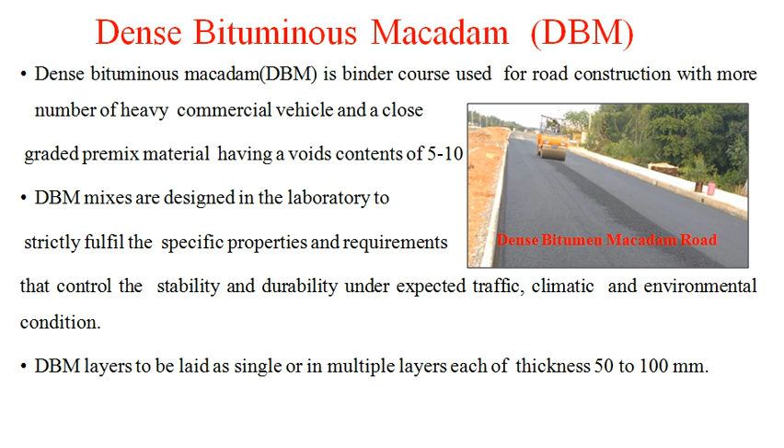The dense bituminous macadam layers, which are to be laid as a single or in multiple layers, are to be laid in a thickness of 50 to 100 mm each.

Now the materials used for the construction of the dense bituminous macadam. In order to satisfy the criteria of the DBM mix, it shall consist of the coarse aggregate, the fine aggregate and the filler in suitable proportions with the required binder content. This proper blend of the aggregate should be done so as to make the final gradation such that it will satisfy either of two limits according to the thickness in the adjacent table.

So if you see the table here, we have the grading number and the sieve size. So this DBM mix should satisfy the grading as per the given table, and it should be a well graded mix so as to fill in the voids which are being left out by the coarse aggregate.

The voids present in the coarse aggregate will be filled by the fine aggregate, and then the voids present in the fine aggregate will be filled up by the filler material, whereas the binder, that is the bitumen, will form a better bonding between all these ingredients. At the same time, it will also fill up the voids left after the filler gets added into the coarse and the fine aggregates.

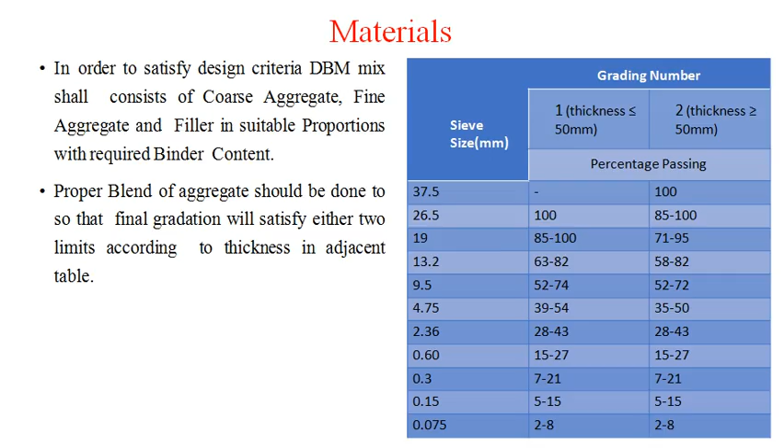Next is the coarse aggregate. Coarse aggregate is retained on the 2.36 mm sieve, and it should preferably have low porosity. In case the aggregates present on the site are more porous, then extra bitumen for the absorption by the aggregates shall be provided in order to satisfy the design criteria.

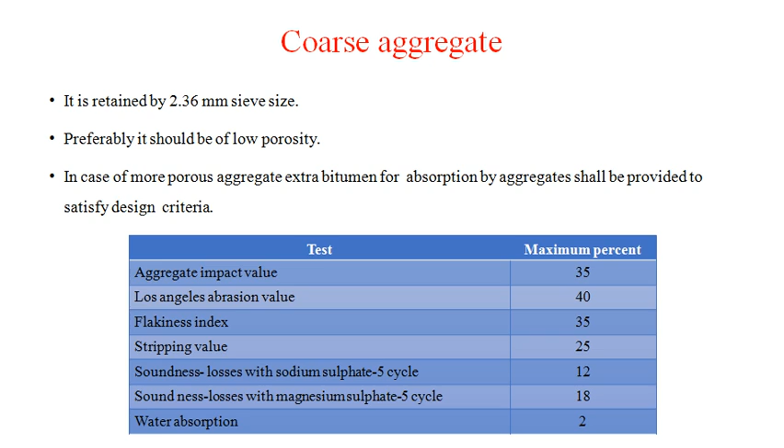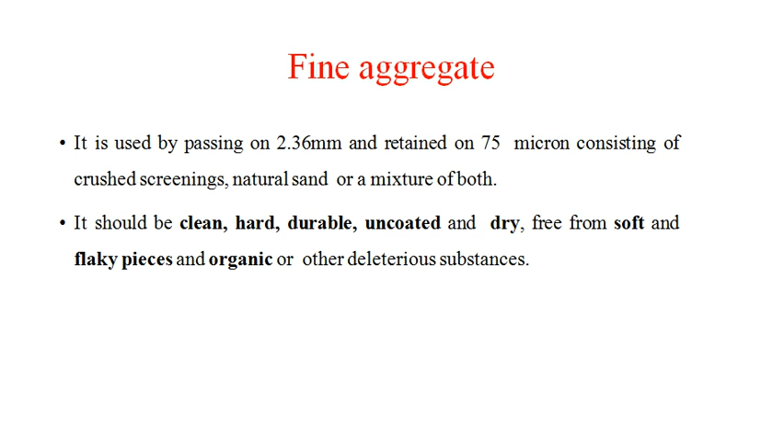Next is the fine aggregate. It consists of the crushed material passing the 2.36 mm IS sieve and retained on the 75 micron sieve. This fine aggregate should be clean, hard, durable, uncoated and dry. It should be free from soft and flaky pieces and organic or other deleterious substances.

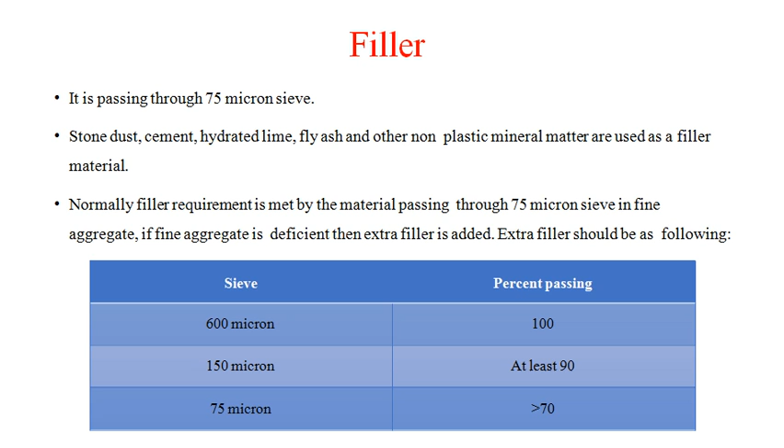The bitumen. The bitumen shall be viscosity grade paving bitumen complying with the Indian standard specifications, and the appropriate grade of the bitumen should be selected after considering the region, the traffic and the environmental conditions where the pavement has to be constructed.

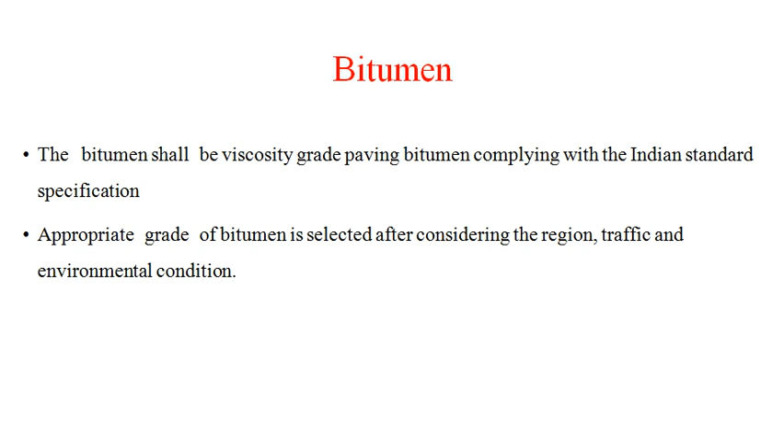Next, the construction procedure. The various steps to be followed in the construction of a DBM are: first, the preparation of the base; second, the preparation of the mix; followed by the spreading of the mix, then the compaction, and lastly opening to the traffic.

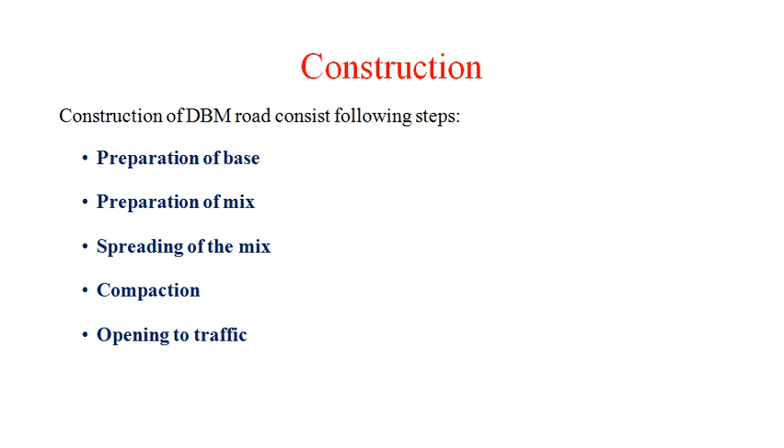Now first we should discuss the preparation of the base. The base on which the dense bituminous macadam is to be laid shall be prepared to the specified dimensions, and the surface should be thoroughly swept and free from dust and other materials.

If the base is irregular and wavy, then a proper corrective course of adequate thickness should be provided in order to rectify the profile and to make it horizontal. Then after the tack coat is applied as per the specification, we can go further for the provision of a base course.

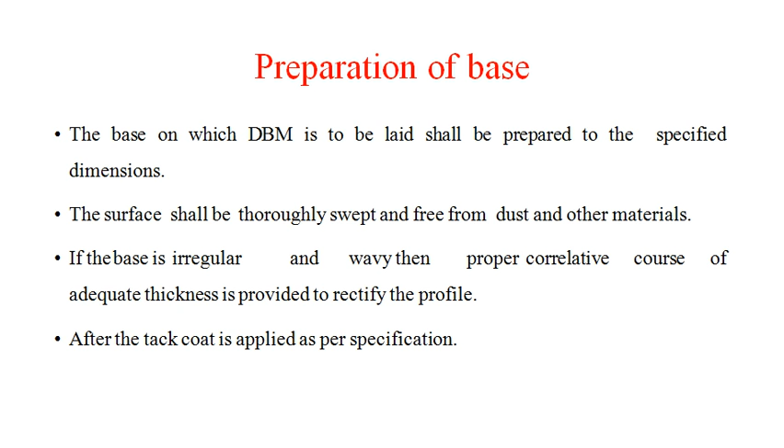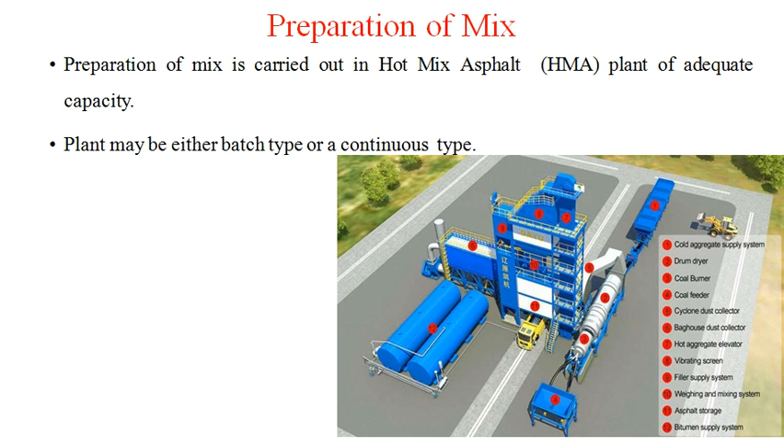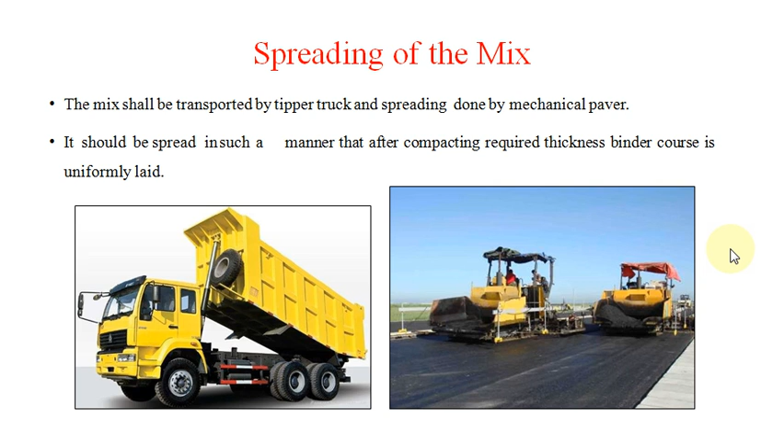Next is the compaction. The mix, after it is spread, has to be compacted using a set of rollers at a speed of not more than 5 km per hour. The typical rolling used in the compaction is initial or breakdown rolling by an 8 to 10 ton tandem wheel vibratory roller.

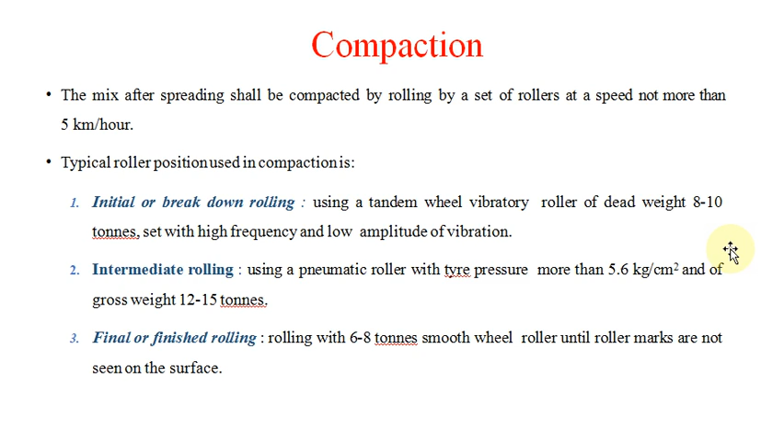Now the intermediate rolling is done by a 12 to 15 ton smooth wheel pneumatic roller. Finishing the rolling with a 6 to 8 ton smooth wheel roller until the roller marks are not seen on the surface.

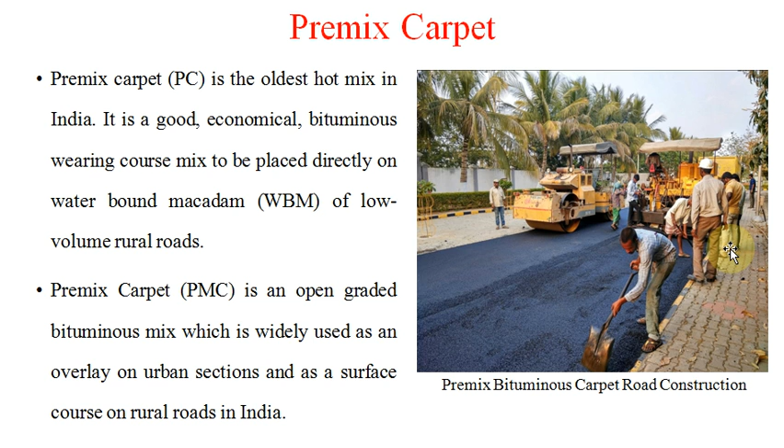Next is the premix carpet. Premix carpet is the oldest hot mix in India. It is basically an economical, good bituminous wearing course mix to be placed directly on the water bound macadam of low volume rural roads. This premix carpet is an open graded bituminous mix which is widely used as an overlaying layer on urban sections and as a surface course on rural roads in India.

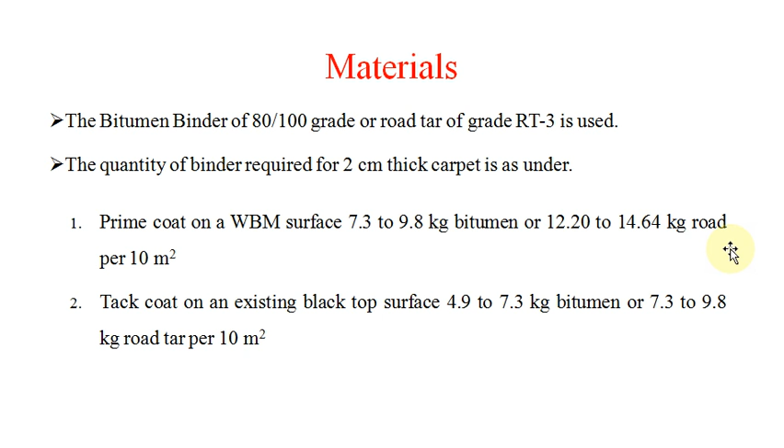The materials used: first, bituminous binder of grade 80/100 or road tar of grade RT3 is used. The quantity of binder required for a 2 cm thickness carpet is as follows. First, the prime coat on the water bound macadam surface of 7.3 to 9.8 kg bitumen or 12.20 to 14.64 kg road tar per 10 square meters of area, and tack coat on an existing blacktop surface of 4.9 to 7.3 kg bitumen or 7.3 to 9.8 kg road tar per 10 square meters area is required for the construction of the premix carpet.

Next, for the premixing, depending upon the size and quantity of the chippings for both sizes of aggregates, a total of 14.92 kg road tar binder is required for 10 square meters of area, and for the carpet of 2 cm thickness, stone chippings of 12 mm size, that is passing through the 20 mm sieve and retained on the 10 mm sieve, are required at the rate of 0.183 cubic meter and 0.091 cubic meter per 10 square meters of area.

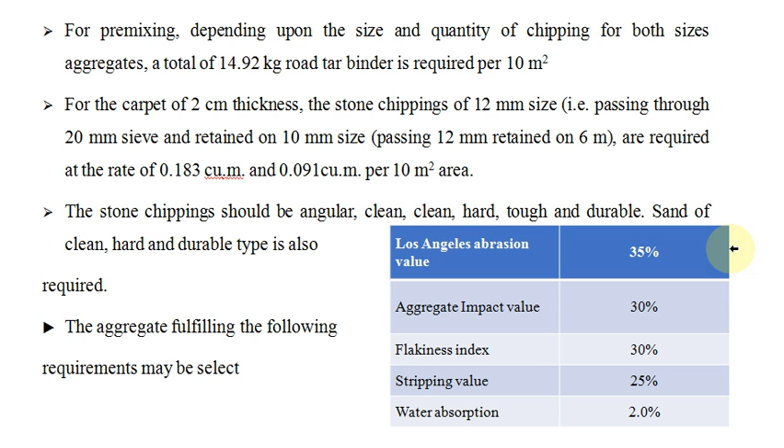Again, the stone chippings should be angular, clean, hard, tough, and durable, and clean, hard and durable sand is also required. Aggregates fulfilling the requirements given in the adjacent table are preferred to be used in the construction of the premix carpet.